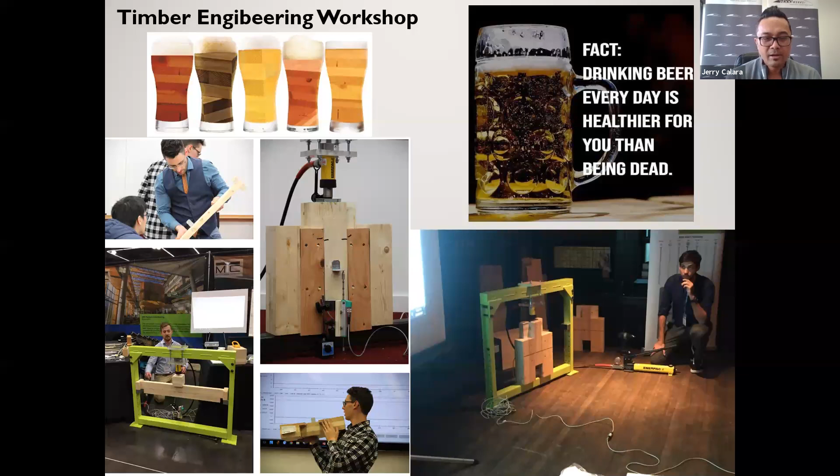Again, it's a great workshop. And it's amazing that, with the engineers, no offense to any of them, but generally they're very professional and straight up and business-like. And it's amazing how, once they have a few drinks, they start to loosen up and are willing to share and talk about their projects. So that's the whole purpose of these events, to allow the design community to get together, to network and to learn.

We also provide case studies. I showed you guys one earlier of the Philip J. Currie Museum. You can find these online, they're on our website. Some great resources for you guys, free downloads.

We also celebrate the architects and engineers and the design community. We hold a Wood Design Awards every year. The designers submit their wood projects into different categories, whether it's commercial building, educational building, institutional, whatnot. Then we fly in jury members, sit in the boardroom, and deliberate all day to come up with the winners of each category.

Then the winners of each category are celebrated at our gala, and also get published into this really awesome awards book. These books are pretty amazing. If we were in person, I would actually be giving some of these away to you guys. They're great books, really inspirational. So the winners get published into that.

We also hold our annual conference and trade show, called the Wood Solutions Fair. It's a full day of networking, learning, and visiting with all the different wood suppliers and manufacturers, and checking out some of the award-winning structures being presented on.

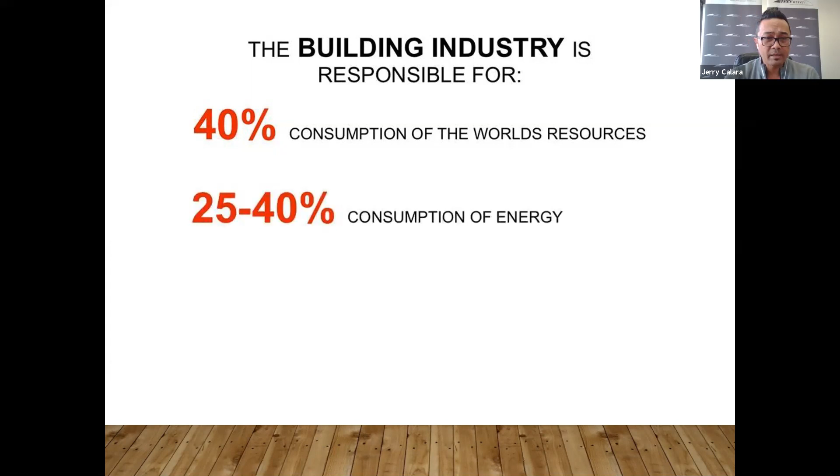For this pace of growth and development to be sustainable, it's essential that we rethink environmentally taxing traditional steel and concrete structures, and look to wood innovations offered for taller structures that are high performing and renewable to meet the coming demand. The building industry is responsible for roughly 40% consumption of the world's resources, 25 to 40% consumption of energy, 30 to 40% emission of greenhouse gas, and 30 to 40% of solid waste generation. The building industry uses mostly concrete and steel.

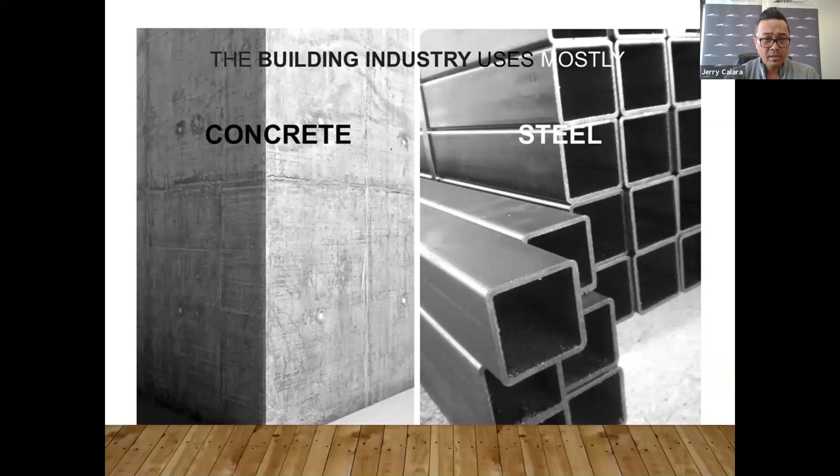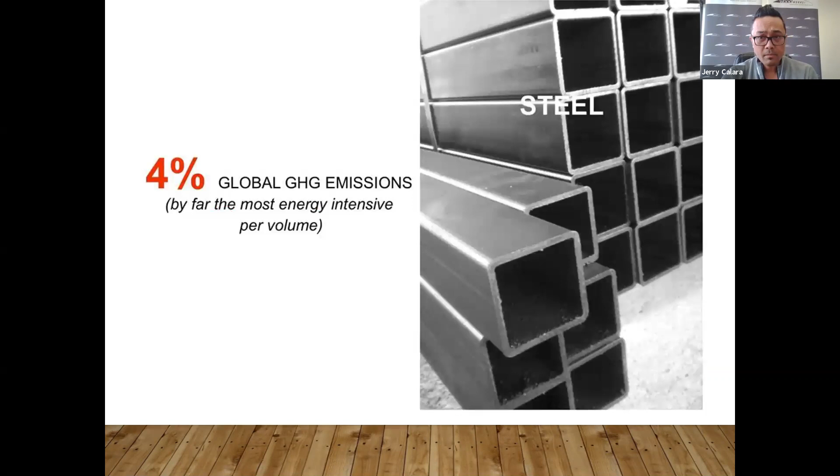Concrete is responsible for roughly 5 to 8% of global greenhouse emissions, and steel is responsible for roughly 4% of global greenhouse emissions. Add to that the airline industry at 1.6% and shipping another 3%. So we've got some really big problems, and it's posing some big responsibilities to not only the design community, but also provincial, federal, and municipal governments.

Wood as a material is a preferred building material for residential construction. It has been for decades, for centuries, in fact. New engineered wood products, EWPs, and code changes have increased the share of commercial markets, and new building systems and technology have been developed to push into the future of wood construction. Mainly, we're going to be talking about mass timber panels.

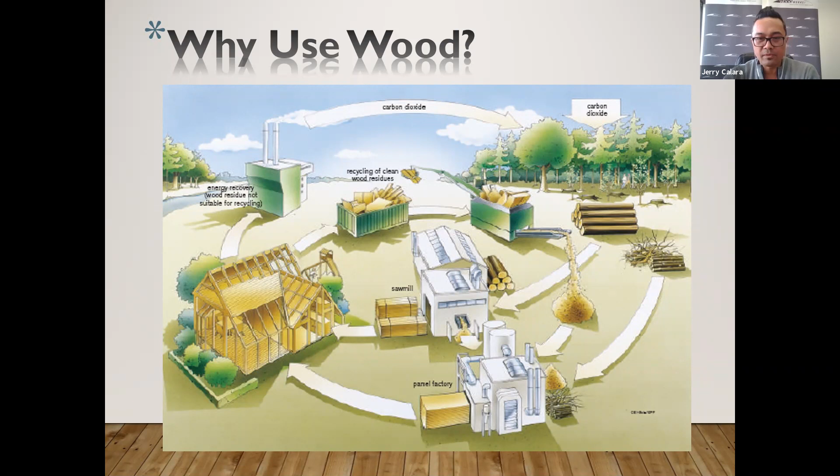We all kind of know the life cycle. When a tree is cut down, through photosynthesis there's carbon in there, and so the carbon it sequesters during its life cycle is retained within its cellular structure. That carbon is then placed in a dormant state, removed from the atmosphere for the life of that wood, for decades. So the manufacturing of wood products results in the storage of a portion of the tree's carbon in long-term storage media, such as houses, buildings, and furniture. The carbon is only released back into the atmosphere when the wood is burned or when it biodegrades.

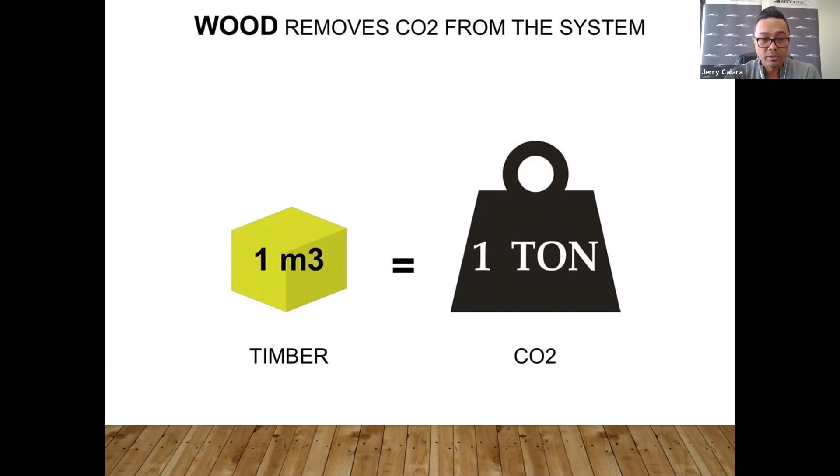One cubic meter of timber can hold roughly 1 ton of CO2. So your typical 2,400 square foot wood frame house holds approximately 28.5 tons of carbon dioxide, which is an amount equal to the emissions of a small car over 5 years.

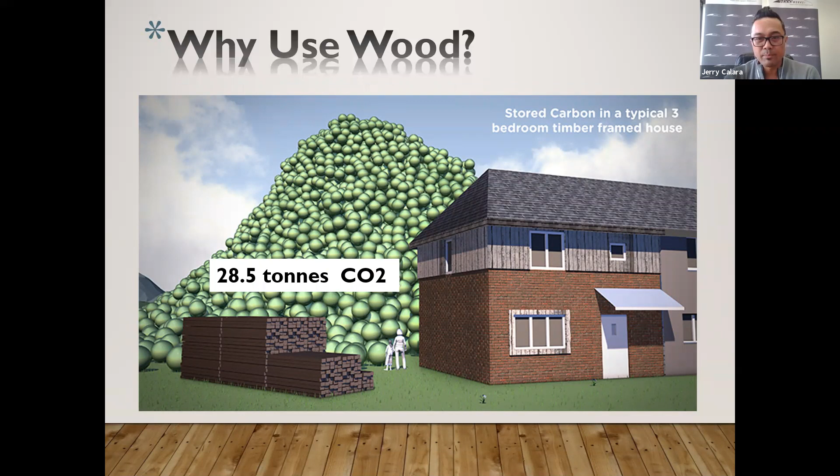More than half of Canada's forests are naturally reforested. Natural regeneration is supplemented by planting of, remember this number, 600 million seedlings per year, Canada-wide. Over 30 different species of trees are used in replanting activities across the country to remain faithful to the natural biodiversity of each area.

The rate of growth in Canada's commercial forests is such that in this hour-long lecture I'm giving you, the forest in Canada would have grown enough wood to supply over 2,000 houses in an hour. In Alberta, we plant roughly 2 to 3 seedlings for every 1 tree that we harvest, so approximately 65 million trees are planted every year just here in Alberta alone.

Forest companies are required to have long-term plans, because the land is crown land, and a lot of these forest companies lease the land for 50, 100, or 200 years. The province and the feds require them to have these harvest plans - 25-year plans, 50-year plans, 100-year plans - and a certificate is only issued after a thorough review by third-party auditors determines that, among other things, long-term harvests are sustainable, there is no unauthorized or illegal logging, and that wildlife habitat is preserved and soil quality is maintained.

Wood also has this natural benefit—it's a natural insulator. It contains a natural honeycomb of millions of tiny air spaces within the fibers. If you were to gather a whole bunch of straws together, that's kind of what it would look like under a microscope, a cross section of a tree. Those tiny air spaces create natural insulation.

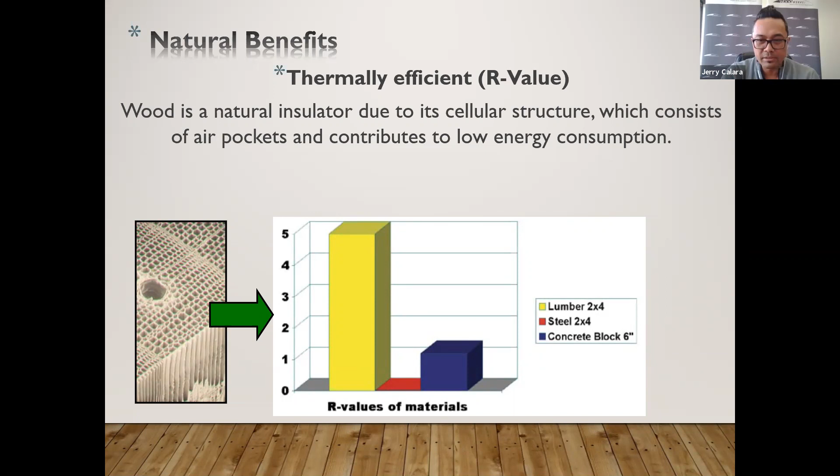Wood's been shown to be 400 times more effective than steel, 1,800 times more efficient than aluminum, and 8 times more efficient than concrete. Wood has an R value of roughly 1.5 per inch. Steel has essentially 0 R value—about 0.0024 per inch.

There's also a lot of health benefits too. Wood and health in the built environment has research supporting it in evidence-based design. One of my old colleagues, Dr. David Fell with FP Innovations, did research at the University of British Columbia while we were at FP Innovations, exploring the link between the use of wood indoors and the well-being of building occupants.

If you want to read more on that, you can Google his paper. There's also a white paper from Commercial Architecture with similar research you can look up.

Basically, Dr. David Fell's study looked at psychological stress responses in wood and non-wood environments. They had different offices—some had wood desks, wood shelves, and a plant in them.

The other office was just basically melamine IKEA stuff. They had subjects in the wood treatment room, and what ended up happening was the subjects in the wood treatment room displayed lower psychological stress responses before, during, and after a stress-inducing test versus the subjects in the non-wood room.

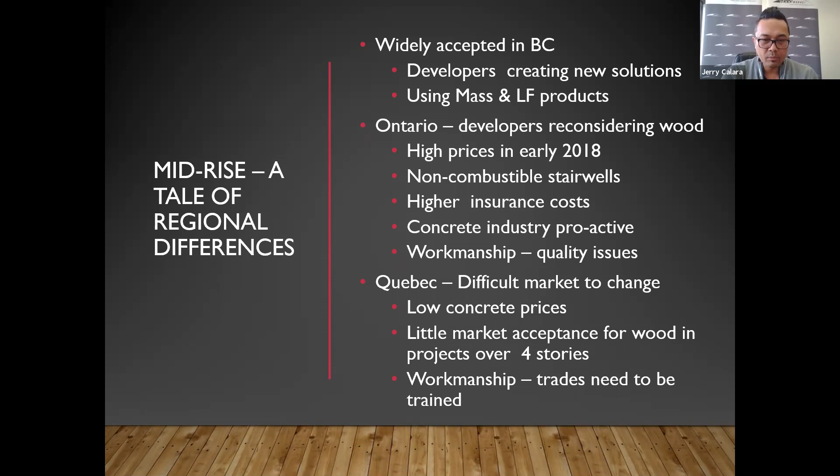The same thing with Quebec is, again, a difficult market to change. They have very, very low concrete prices there, and a lot of concrete manufacturers, so their concrete prices are very low. And again, the workmanship, the trades need to be trained over there, right?

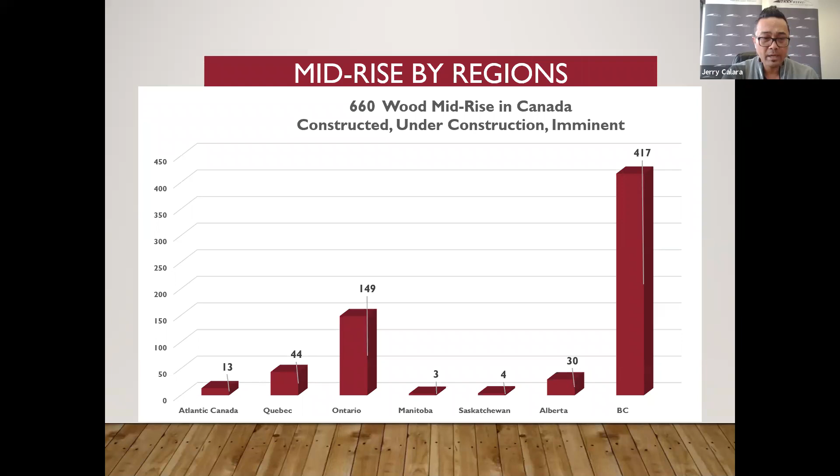This is a project in Vancouver, the Virtuoso, Adera Developments. Adera Developments were part owners of a company called Structurlam at one time. Since then, they've been bought out by a large investment firm out of the States. But with Adera being part owner of Structurlam, they had to kind of practice what they preach, right? So what they did was they started building some of their developments with the mass timber products they're producing.

So this is a 6-story residential light frame. It's a hybrid, so it's mass timber and light wood frame. It has a quiet floor system which competes with concrete. There's time savings, and it has superior acoustics similar to that of concrete, just because these mass timber panels are being used for the floor systems and the roof panels.

160 CLT panels were lifted at a rate of 1 every 12 minutes. You can see the picture below, the guys are installing one of those panels, installing one every 12 minutes.

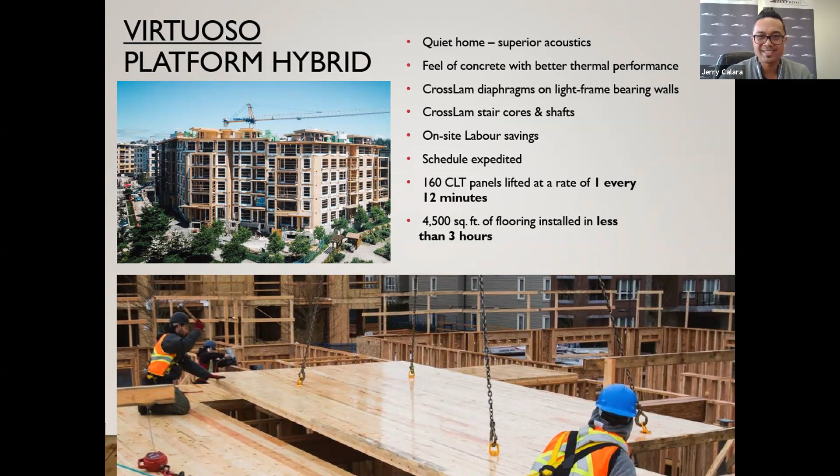And so they're able to frame up 4,500 square feet of flooring installed in less than 3 hours. So there's huge time savings there, right? If they were to do these type of floor panels in, let's say, I-joists or engineered wood products, it would take anywhere from a week to a week and a half just to frame out that whole floor system. Whereas with these mass timber panels, because they're covering off such a large quantity, they're able to install a whole floor of floor panels in a day, right?

Which allows them to start framing up the walls quicker, sooner.

This is another example, the Legacy in Langley, BC. This was sold as a higher end condos. You can see the CLT came in handy here, cantilevering out those balconies, and they were able to come up with these really crazy curvature balconies. They were able to do that with the CLT because a lot of that was already cut in the factory and then just shipped out to site.

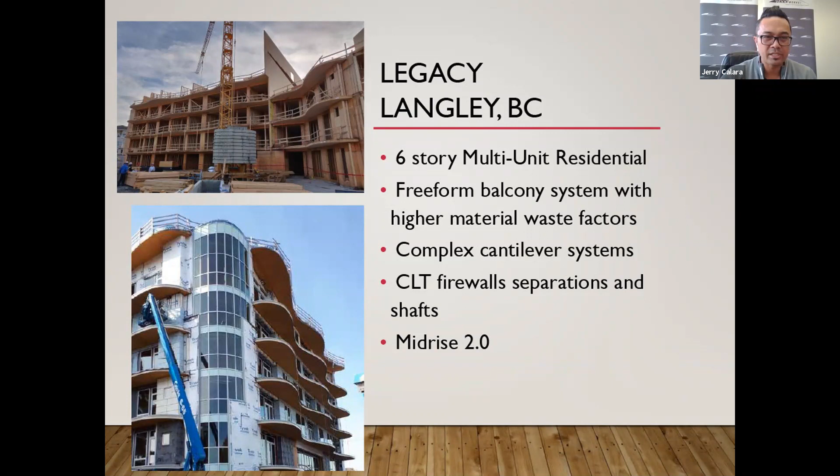Now this is Hockley Ave, another Vancouver project. Three of these large 6-story light frame hybrid structures. As a developer, if you're with developers, their biggest concern is costs and making money. If they're going ahead and building 3 of these 6-story buildings, they obviously see the value in this. They're not doing this just as a practice trial run. They're doing this because they know that they can make a huge return on their investment.

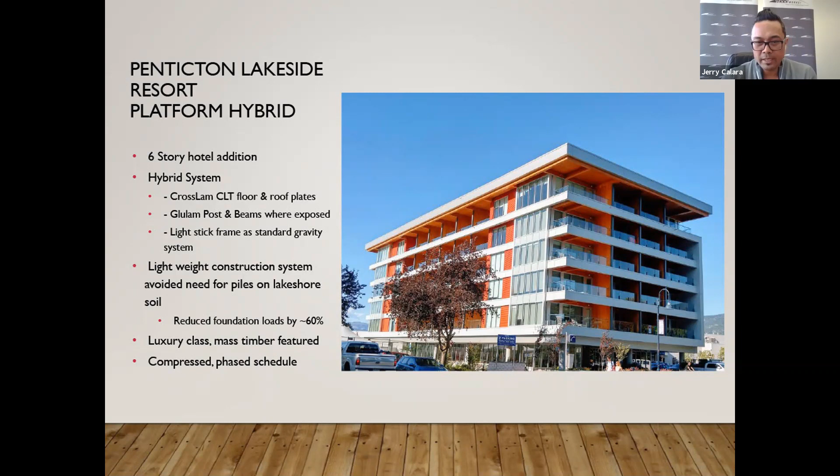So we have some of these solutions. Going to be talking about some of these new products with enhanced properties, which is going to allow the developers to build quicker, meet and exceed structural and fire requirements, and be cost competitive, and we can use these in mid-rise buildings. Mid-rise is considered 5 to 6 stories, and tall wood is considered anything 7 and above.

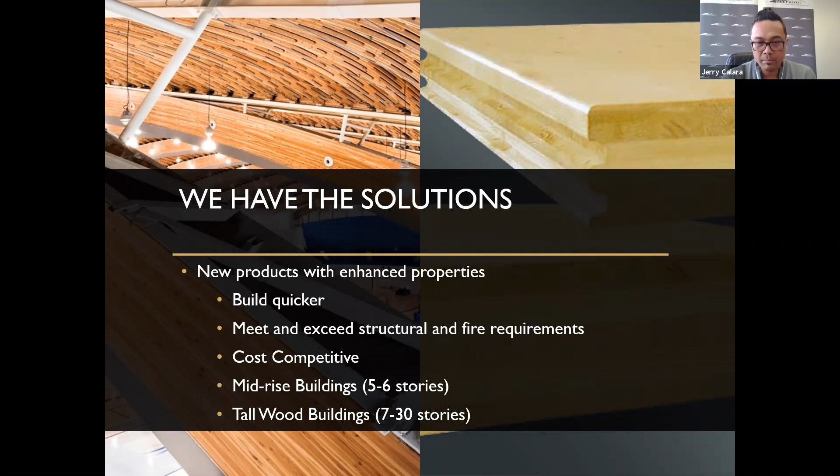Mass timber construction uses large and ideally prefabricated wood for walls, floors, and roof construction. Because of their high strength and dimensional stability, they can be used as alternatives to concrete, masonry, and steel in many building types.

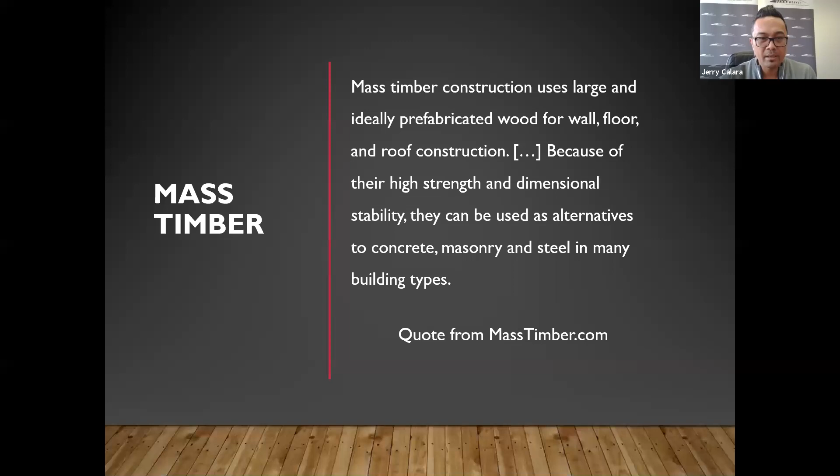So these are some of the innovations that we're going to talk about: nail laminated timber, dowel laminated timber, glue laminated timber. You guys might already be familiar with cross laminated timber, and then there's LSL, LVL, and the wood concrete composite. So you're probably thinking, wow, I didn't realize there's so many different options of mass timber out there. Well, there are, it's not just cross laminated timber, there's other solutions out there. The thing with cross laminated timber is that it's being shown more, it's being marketed more heavily, and that's probably why you're a little bit more familiar with cross-lam than some of the other options available to you guys.

So Nico, before I get into the mass timber products here, are there any questions that have kind of popped up yet?

Yeah, you have a question about the acoustics of the floor assemblies. Okay, how did they achieve high acoustics controlled floor assemblies?

Okay, so there's many different solutions. We've partnered with a company called Acoustitech, and they have different types of solutions like matting solutions. A lot of times when you're using these mass timber panels for floor structures, generally you're going to add a layer of either gypcrete or concrete. Depending on the thickness, that'll help you achieve the acoustic rating that you require. So with the floors, there's an IIC classification that you need to meet, and through the walls and whatnot there's an STC classification that you need to meet.

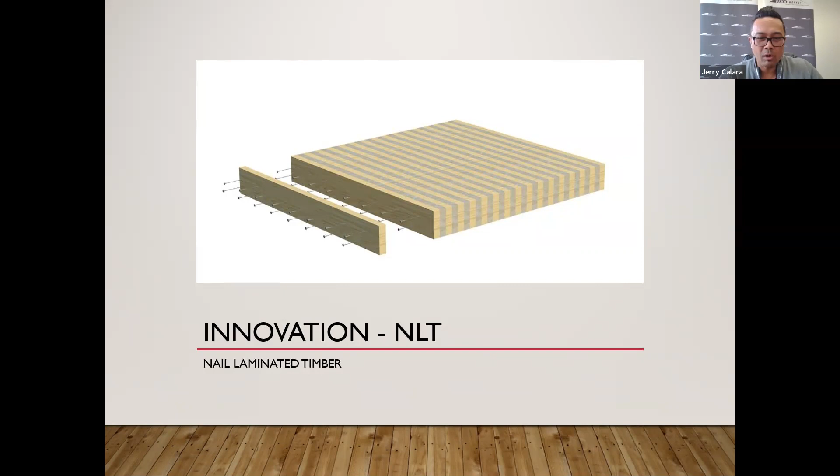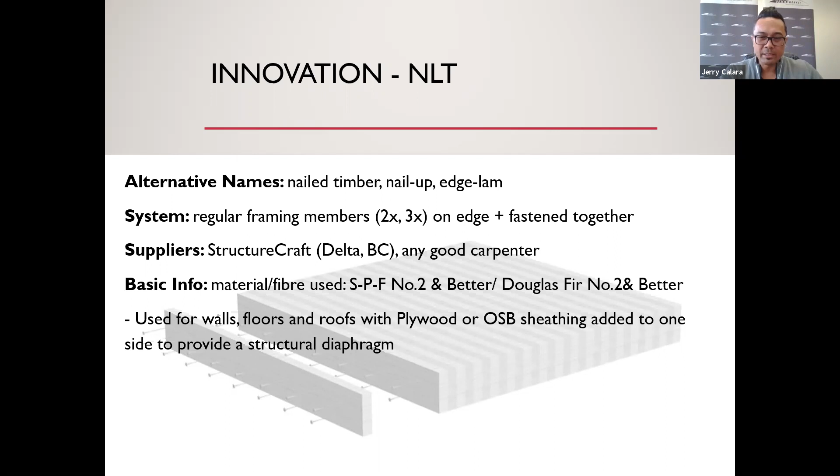Okay cool, so the first one I want to talk about is NLT, nail laminated timber. It's a structurally efficient and economic panel product, which can be used for floors, walls, and roof structures. Basically, NLT is created from dimensional lumber stacked on edge. So you can take your 2x6, 2x8, 2x10, 2x12, and then laminate them together using nails, mechanically fastening them with nails, essentially 1.5 inches on center. Now, the thing with NLT is that in order to create a structural diaphragm, you need to add a layer of plywood or OSB sheathing on one of the sides, and by doing that it allows you to have that structural diaphragm that you require.

NLT is sanctioned by the building codes and qualifies as heavy timber. So as such, it doesn't require an alternative solution to be used in buildings, okay?

North American lumber by nature has variations in characteristics like straightness, bow and sweep. These are all addressed through a factory quality control process, resulting in panels which can be relied on to be square and true as the building is put together on site.

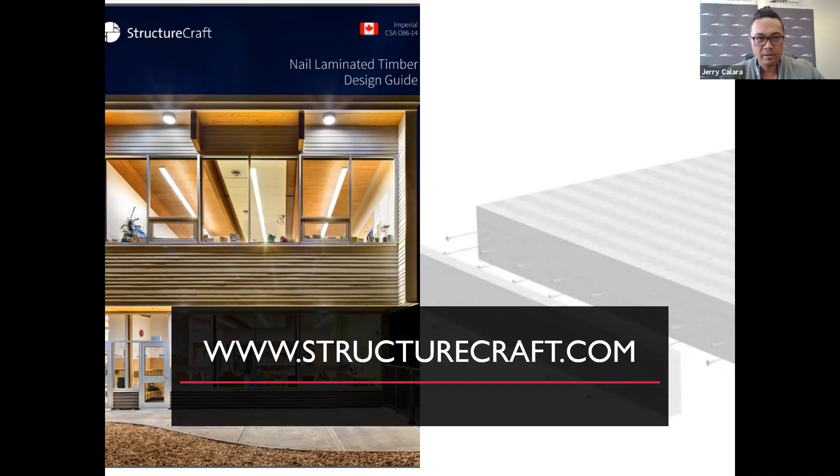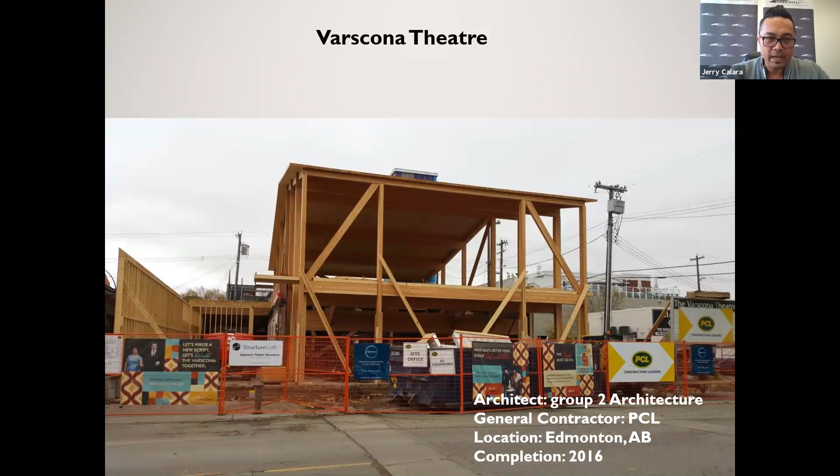This is Varscona Theater, here in Edmonton. Again, NLT panels for the roof structure, and they also used it for some of the seating and the stage as well.

So DLT is dowel laminated timber, very similar to NLT, except instead of using nails, you're using wooden dowels to connect all the members together. You can see you're able to create some really neat profiles here using DLT.

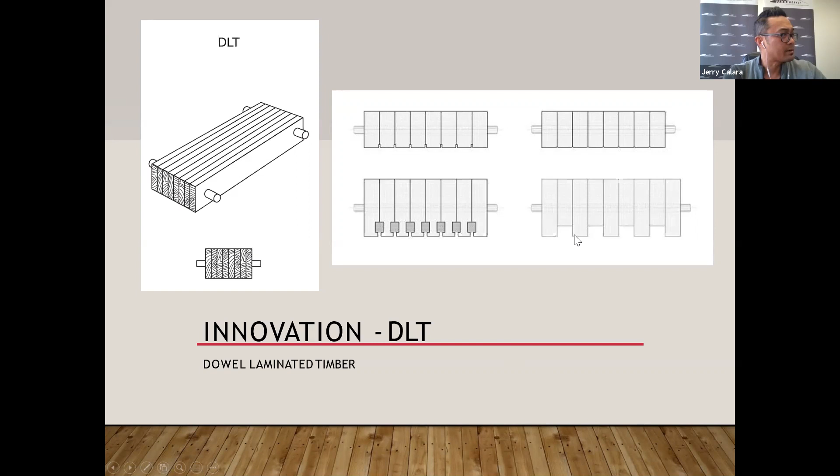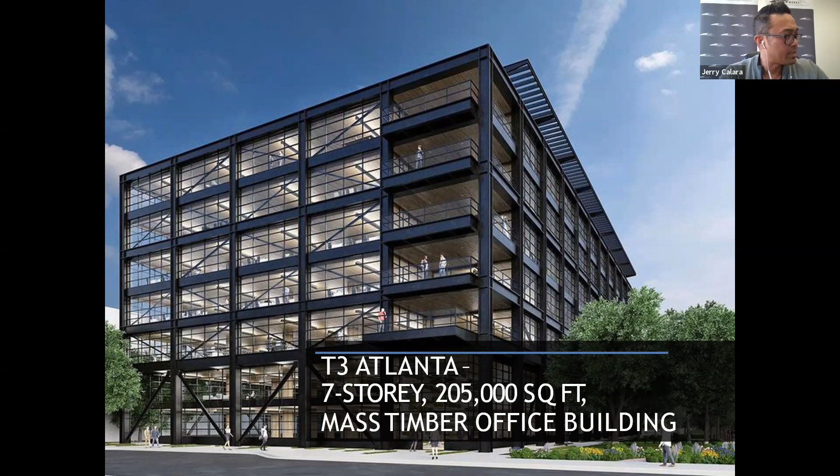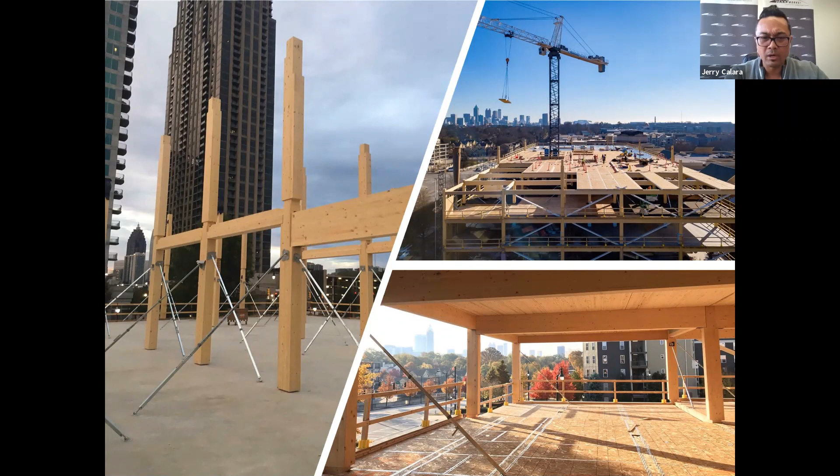This is one of their projects, T3 in Atlanta. It's a 7-story, 205,000 square foot mass timber office building, and they used DLT here. I believe this one is 6 stories on 1 concrete story, but you could see that the building turned out beautiful.

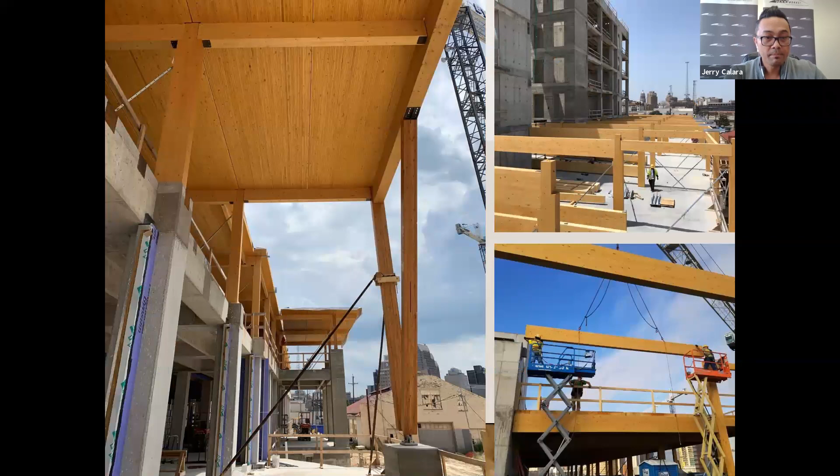The Soto is a 6-story, 120,000 square foot mass timber commercial office building. This is San Antonio's first major mass timber project, again 5 floors of mass timber on 1 story of concrete, and that was using DLT as well.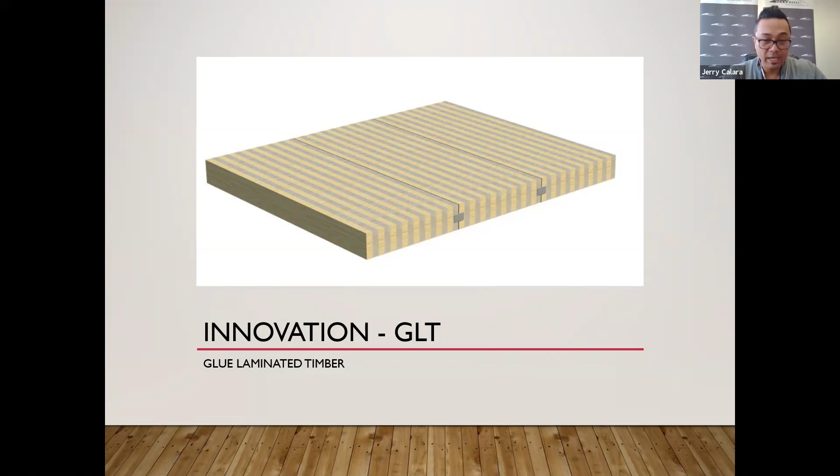Next innovation is GLT. Not really an innovation, it's actually been around for a long time. Generally what we're using these for is it's basically manufactured the same way as a glulam beam, except this time it's turned on its side. It's manufactured to the same high standards as glulam, and it's basically guaranteed to possess the same long-standing history and durability as glulam.

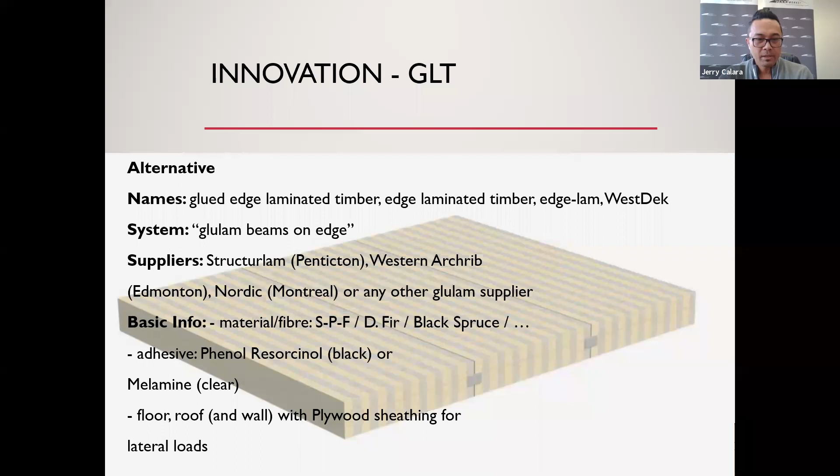You can see some of the manufacturers in the West here: Structurlam, out of Penticton; Western Archrib, as I mentioned, based here in Edmonton; and Nordic Lam also produces it out in Quebec. These panels are produced in 2-foot widths, from 3 1/8 inch all the way up to 8.5 inches deep, and up to 66 foot lengths.

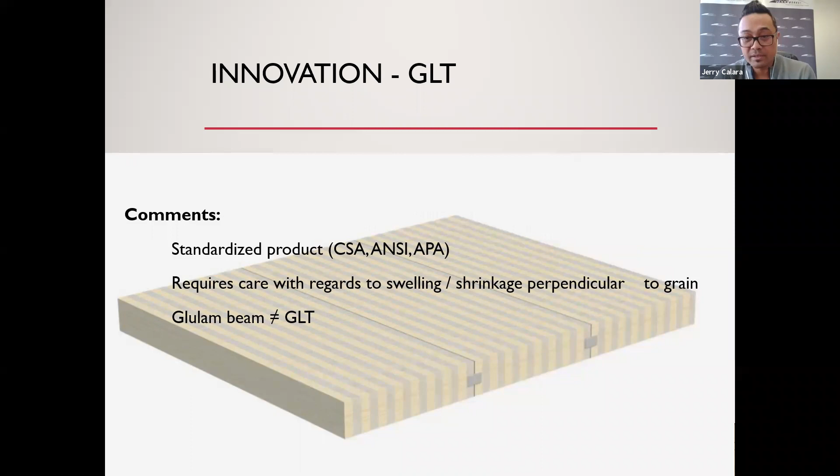Turned out to be a beautiful building.

Next innovation is CLT, and I'm sure most of you guys are probably all familiar with CLT. Basically, it's wood panels typically consisting of 3, 5, or 7 layers of dimensional lumber, oriented at right angles to one another and glued and pressed to form structural panels.

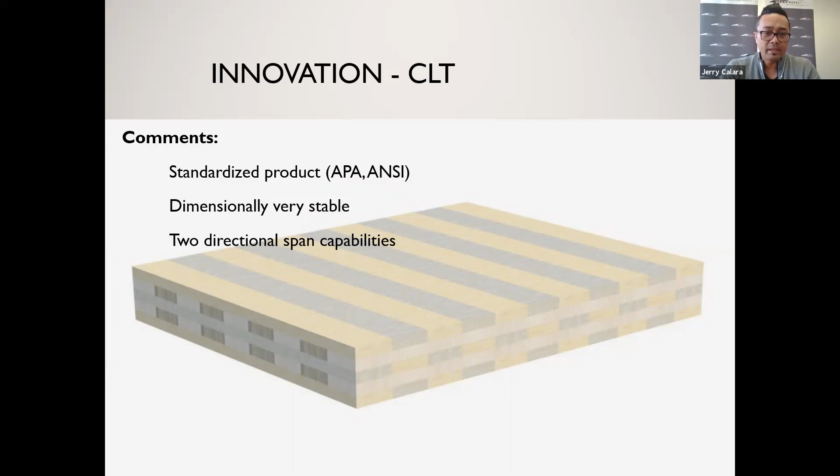Because of CLT's structural properties and dimensional stability, the mass timber product is well suited for floors, walls, and roofs, and used extensively in mid-rise construction and tall wood buildings. CLT can be manufactured to customized dimensions, and panel sizes vary by manufacturer, while the length is usually limited by transportation restrictions.

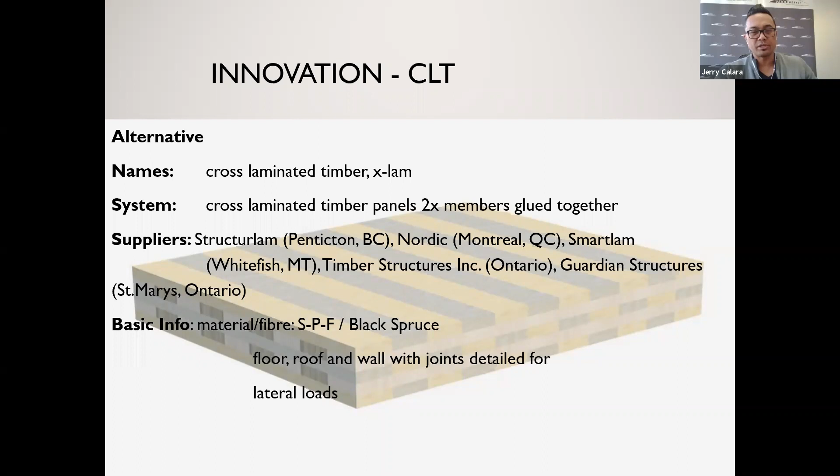What's neat about CLT is that here in North America, FP Innovations developed this CLT handbook, which allows you to essentially design a CLT building just by using it, because most manufacturers have to design and produce to this standard. Whereas in Europe, where CLT was created 20, 25, 30 years ago, each of the different manufacturers consider their CLT a proprietary product, so each one has different design values, and they have to have their own engineering teams design their products over there.

This is Structurlam, based out of BC, one of the major producers of crosslam. Nordic Lam, they're out of Quebec.

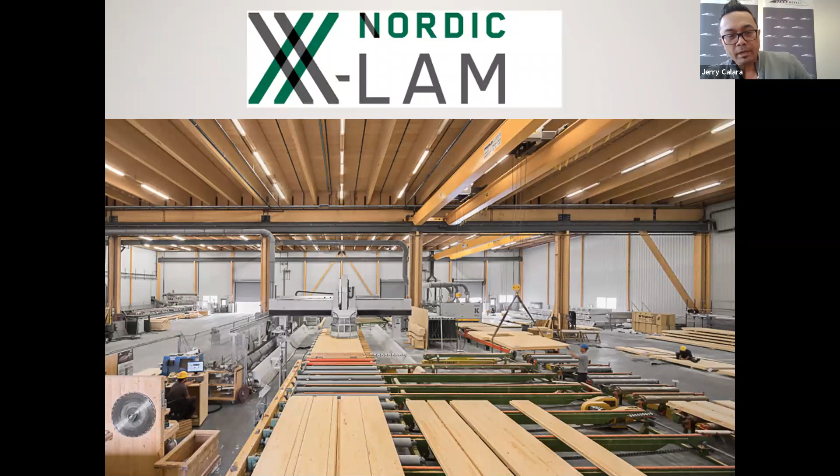And here's another opportunity. If anybody, once we win that 50 million from Elon, we'll take 10 to 15 million of that and build a mass timber manufacturing plant, because the demand in the US is going to be so tremendous that the producers online right now are not going to be able to keep up. I'm going to show you some numbers here.

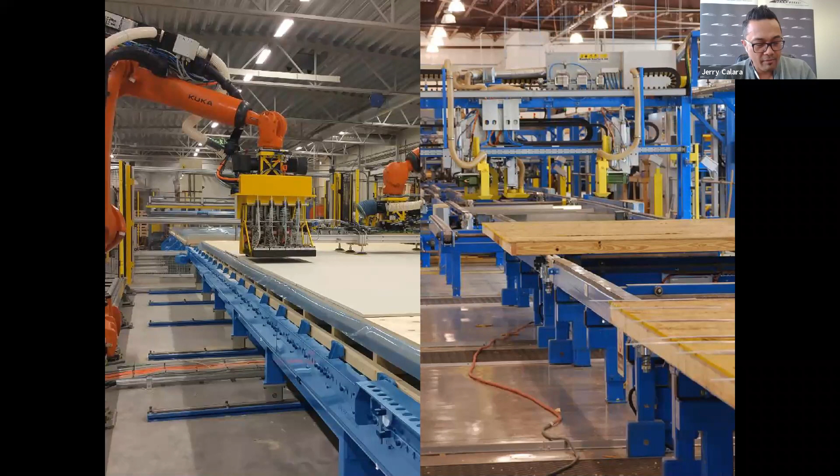And Katerra, the Katerra Group - these guys are massive, man. They've got really deep pockets, and they're buying up everything. I'm sure you guys have heard of Michael Green - Michael Green Architecture, they bought them. They also bought Equilibrium Consulting. So two of the biggest wood advocate firms you could think of here in Canada were bought up by this investment company, Katerra. Now they have the whole team, a whole system where they're designing these mass timber buildings, and they have a lot of money invested in their manufacturing plants. They have a plant online now out of Spokane, Washington, and they're producing CLT out of there.

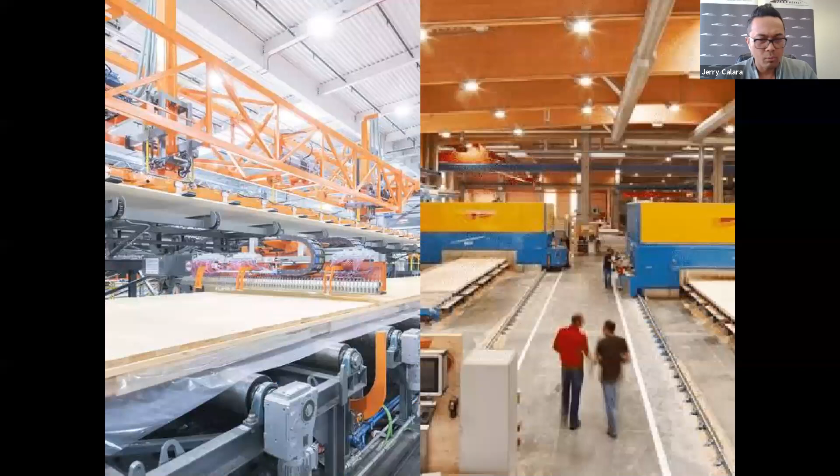A lot of it is automated - they use robotics and automation. Generally when you're thinking about wood products, you're thinking forestry, these lumberjacks with big beards and an axe. That's not the case anymore, man. This is new technology, and a lot of it is highly automated, so there's not a lot of people on the line. A lot of the labor force is actually in the office doing designing and preparation. A plant like this, you might only need a handful of guys, maybe 6 or 7, to actually run it.

So this is one of the examples - this is the Fort Mac Airport. They used CLT for the roof panels there, you could see. They spaced them out, left that space there to run services - their electrical, sprinkler systems, and some HVAC through those cavities. So you could see you could still come up with really neat designs and still accommodate the services.

This is in Calgary - a full wood building, the New Brighton Middle School. They're using glulam beams, CLT floors, and dimensional lumber for the walls.

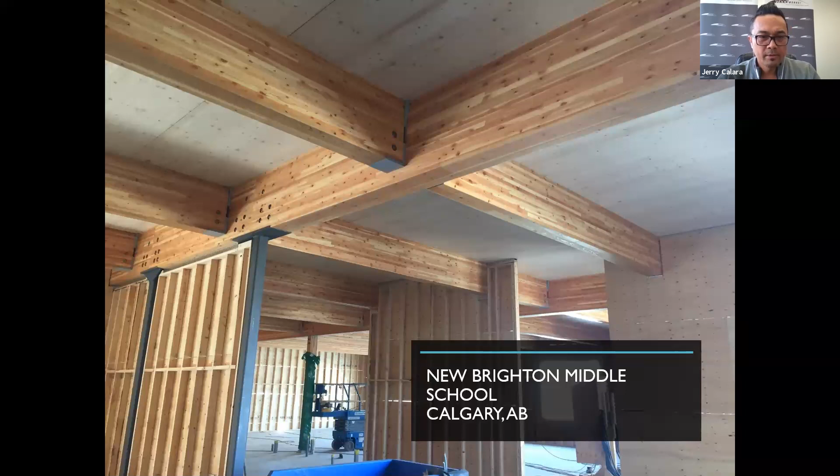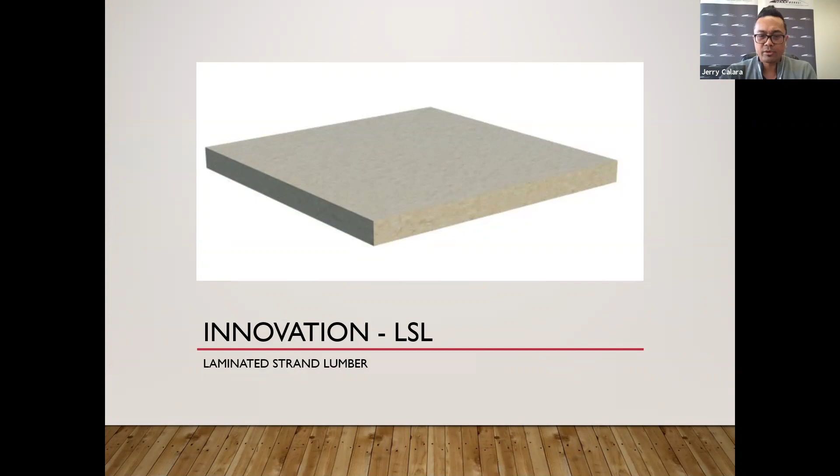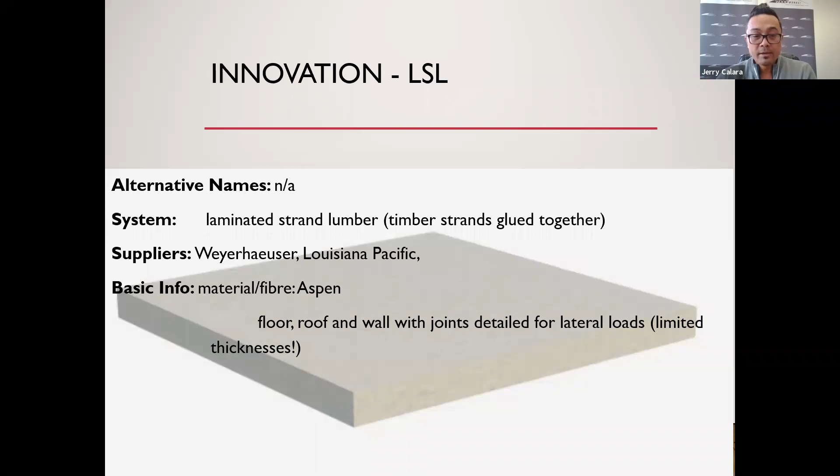Next will be the LSL panels. These are laminated strand lumber, typically used as beams. These panels are manufactured similar to the way they manufacture beams and columns, made by shredding wood from fast-growing trees, low-value hardwood logs such as aspen, birch, and poplar, into thin strands. Then they orient these thin strands for maximum strength and glue them together into long billets using a steam-injected process.

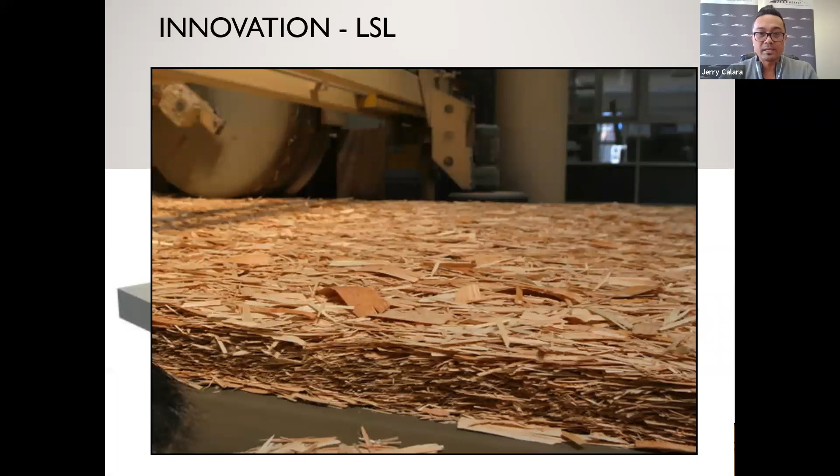Normally what would happen is they'd take these panels and rip them down into beam sizes, like 9.5 inch, 11 7/8 inch, 14 inch, 16 inch beams. But instead, they're manufacturing these from 4-foot panels up to even 8-foot panels, and using them for floors and roofs.

Due to somewhat random strand arrangement, LSL panels provide a really unique architectural aesthetic. It was used in the Civic Center in North Vancouver, where you can see they sanded down the product, put a really nice varnish on it, and used it quite extensively for this building.

Next innovation is LVL. Again, not a new innovation, but a new way of using it. LVL panels are made from peeler logs, basically in the same production line as LVL beams. They're engineered to precise design values with a very high strength to weight ratio. LVL panels are suitable for structural walls, floors, and roof applications.

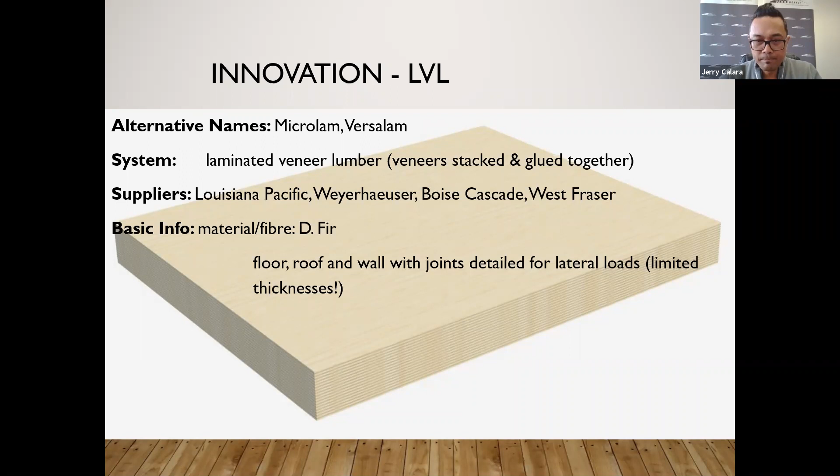Similar to LSL, normally they would rip these down and use them as beams, but they're using them as floor panels and roof panels. With the increasing interest in mass timber use for diaphragm applications, manufacturers are beginning to position LVL in full sheet formats. In typical manufacture, all veneers are laid up so the grain direction is the same in all veneers, with the grain basically parallel to the span.

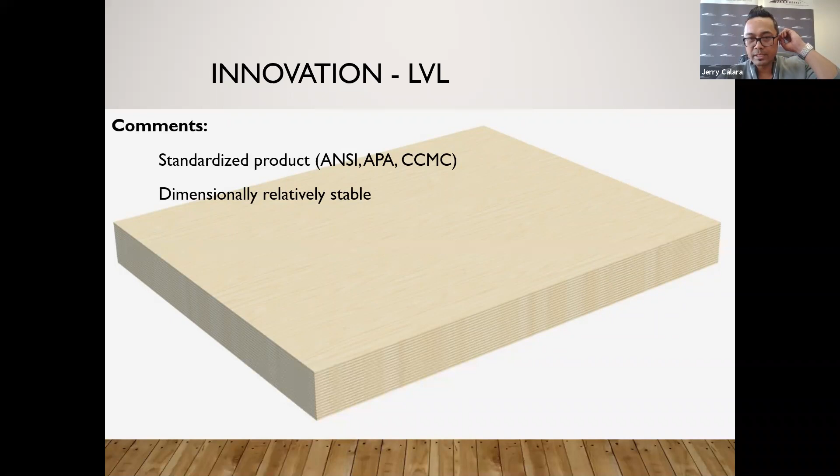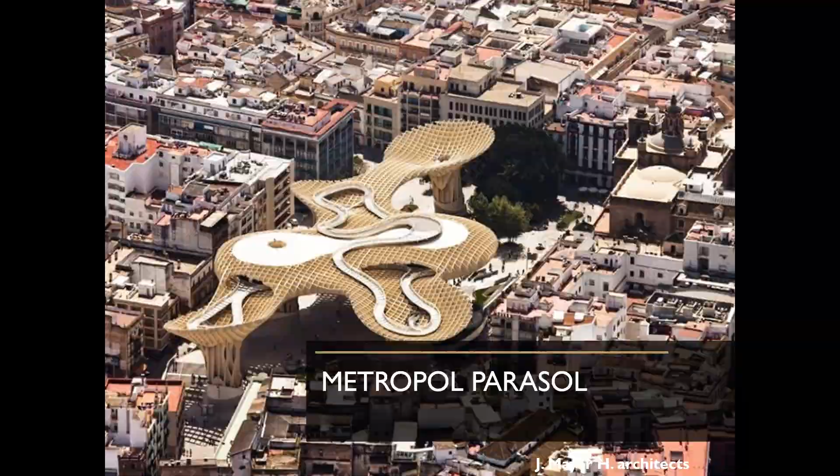This is a beautiful roof structure built in Seville, Spain. The image is really neat because you can see this really large wooden canopy in the middle of a concrete jungle. For generations, their culture has built with brick and mortar, concrete, or masonry, so to have this big, huge wooden roof structure in the middle of their city is really neat. It's a public space, and they hold big dance parties underneath the canopy there.

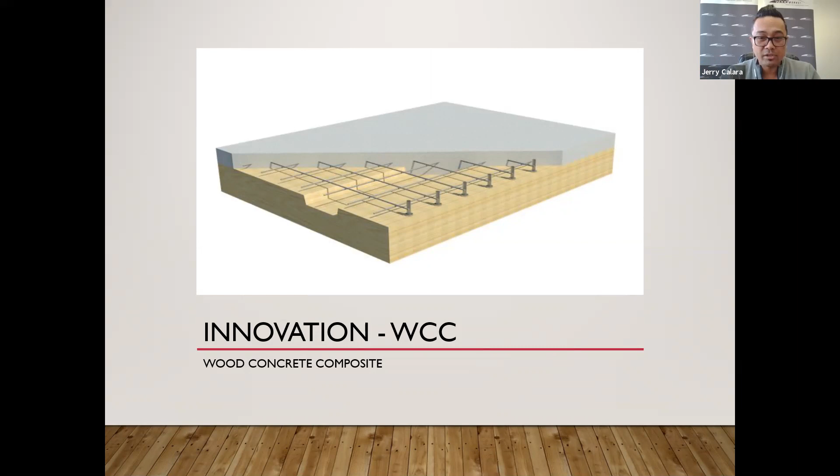Last thing we're going to talk about is wood concrete composite. It's a technology which focuses on optimizing performance and material requirements by engineering a structural connection between the timber and the concrete components. Structural efficiency is gained by creating composite action between the two materials. This hybridization enables designers to reduce cross sections, increase spans, and streamline structures in pursuit of sustainable architecture. Wood concrete composite panels can be used as floor panels or wall panels, using either timber panels or beams.

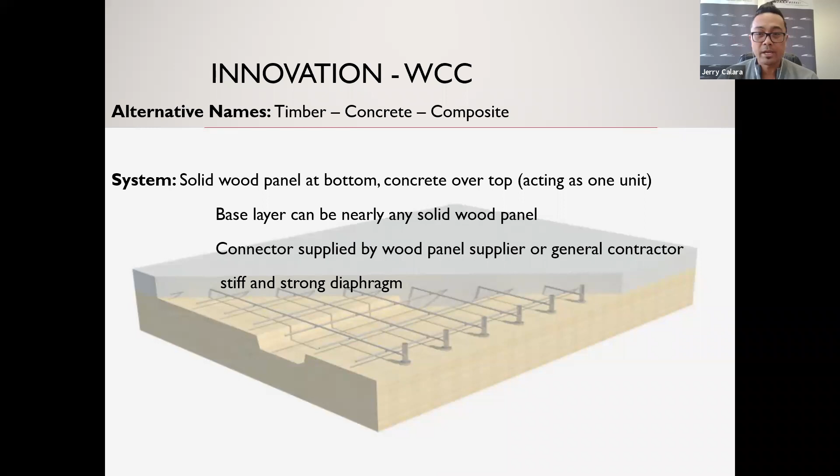There are many methods of creating composite action between the timber and the concrete. One common option is to use diagonal incline screws, half drilled into the timber elements and left protruding into the concrete topping. Once the concrete topping is poured onto the screws, that's what creates the composite action.

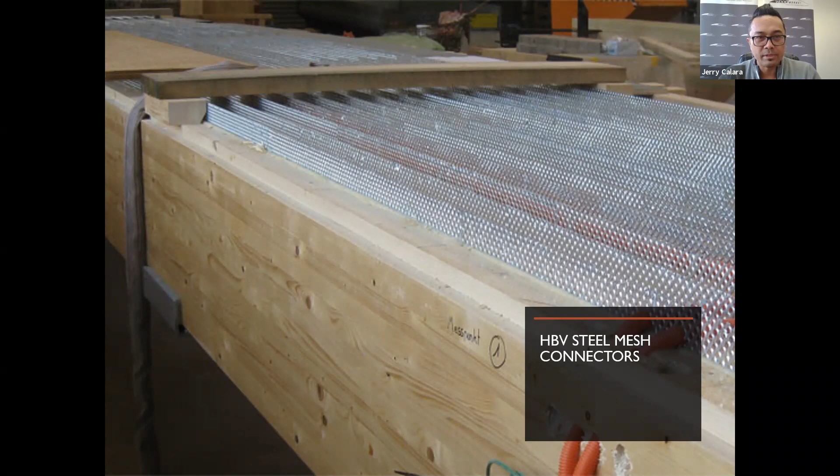There are other proprietary connectors available, including the HBV steel mesh connector. They slot out grooves into the timber panels, then epoxy these mesh connectors into the timber panel, locking them in there. Once they pour the concrete on top, it interweaves between all the holes in the mesh, and that's how the composite action is achieved. This is one example where it was used, on the UBC Earth Science building.

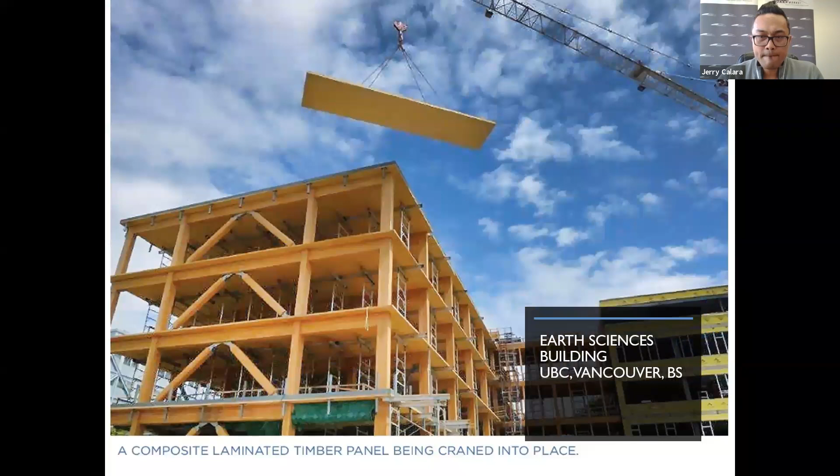We're running out of time, so I'm going to try to whip through the tall wood buildings real quick here. We think mass timber is going to be best utilized in tall wood buildings.

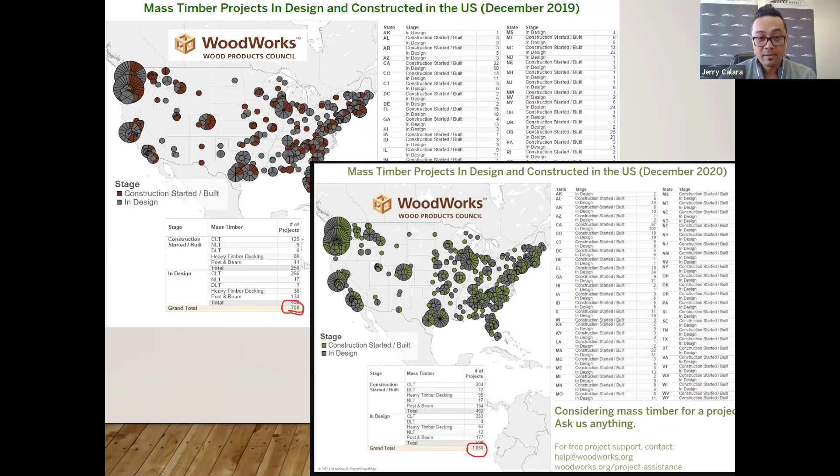Our counterparts down in the US, the WoodWorks group, assist and track all these mass timber buildings being designed or built. In December 2019, there were roughly 708 mass timber buildings that had either started construction or were in the design process. In December 2020, that number jumped up to 1,060. So during a COVID year, there were still 300 new mass timber projects either in the works or in design. You can see there's tons of opportunity with mass timber across Canada and the US.

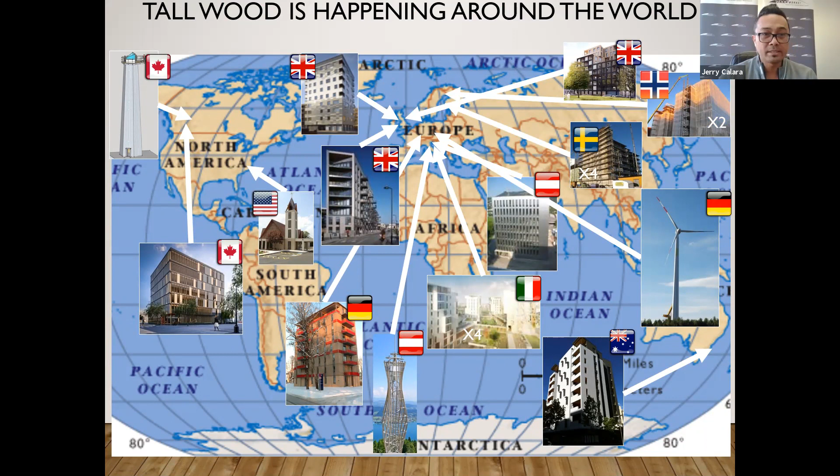Tall wood is happening around the world, and there's this global revolution.

And what we want to do is change the world one mass timber project at a time. We know that wood is a competitive option for tall wood buildings because it allows for faster and safer on-site construction. These prefabricated sections can be manufactured off-site, shipped to the project, and then assembled on-site, significantly shortening the project timelines and improving safety and accuracy.

It allows for tighter envelopes, excellent fire resistance ratings, and excellent structural and seismic performance. Some significant advantages include the ability to build higher in areas of poor soil, since the superstructure and foundations are lighter compared to other building materials. It's quieter to build on site, so adjoining neighbors are less likely to complain, and workers aren't exposed to high levels of noise. Worker safety during construction can also be improved with the ability to work off large mass timber floor plates versus steel joists or I-joists, which are kind of flimsy. It's easier for workers to work off these massive large panels than individual pieces.

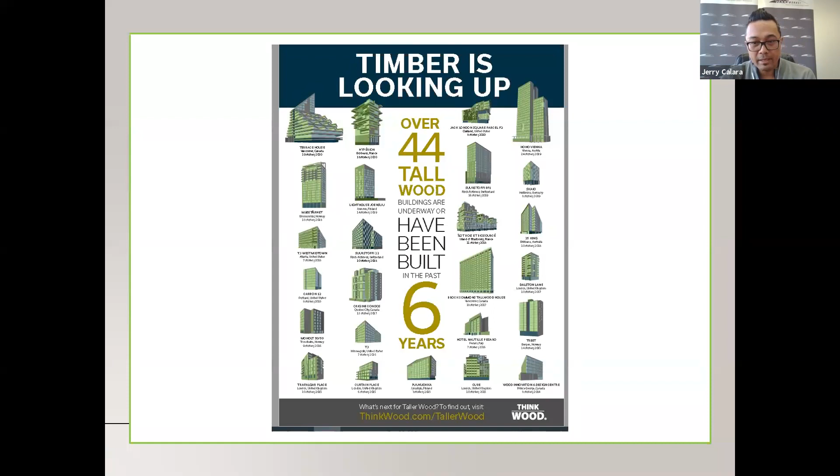So as you can see, timber's looking up, and there's basically a race to the tallest. With our recent code changes in the NBC, Alberta has already adopted 12 stories in Canada. Alberta is one of the first provinces to actually accept the tall wood provision.

BC is a little bit different. Vancouver has accepted it, but the BC government has not accepted it as a province. What they're doing is the BC government has said, okay, if any municipalities want to build 12 stories in BC, we'll support you, but we're not taking responsibility. That's kind of their stance, but hopefully this will eventually roll out nationwide.

In the US, they're going to be able to build up to 18 stories. So again, some big opportunities over there, you guys.

Now I need to first mention Michael Green's concept, the FFTT, which stands for Finding the Forest Through the Trees. Michael Green was the first to do a comprehensive analysis on tall wood buildings covering environmental, structural, seismic, fire, envelope, and cost factors, all documented in the Case for Tall Wood Buildings, released back in 2012. That's really the study that kicked off the tall wood buildings race to the top.

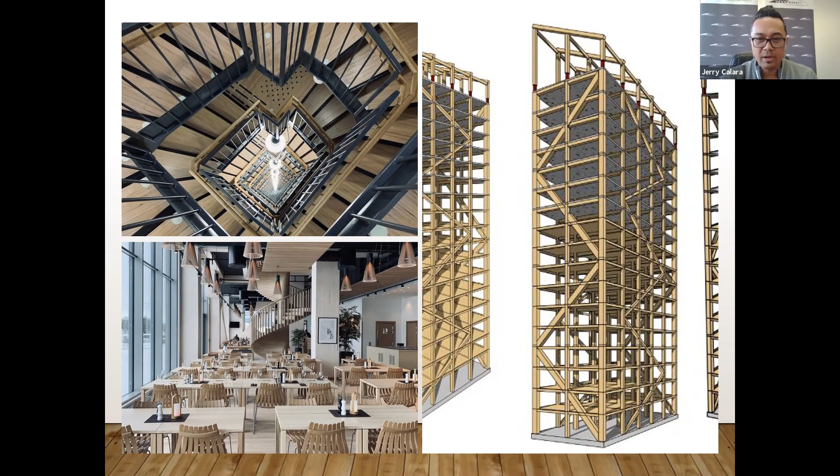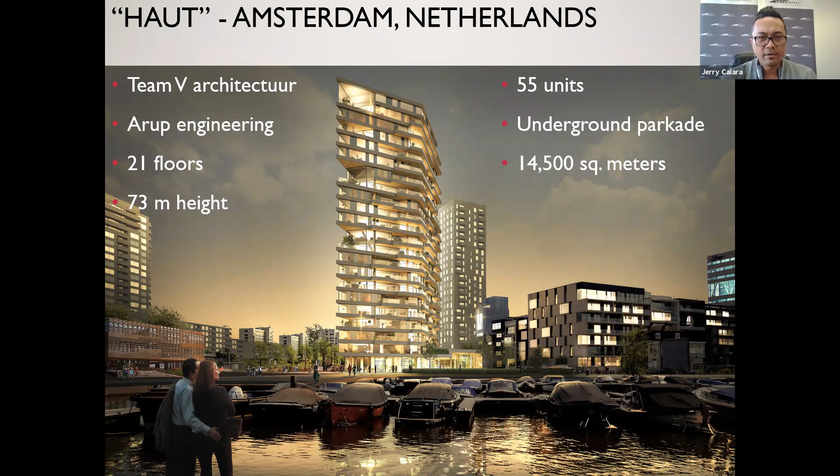This is Haut. This one's already started. It's 21 floors, 55 units. The project name is short for Haute Couture, coming from the tailor-made design of its 55 apartment units. You can see it's a nice looking building.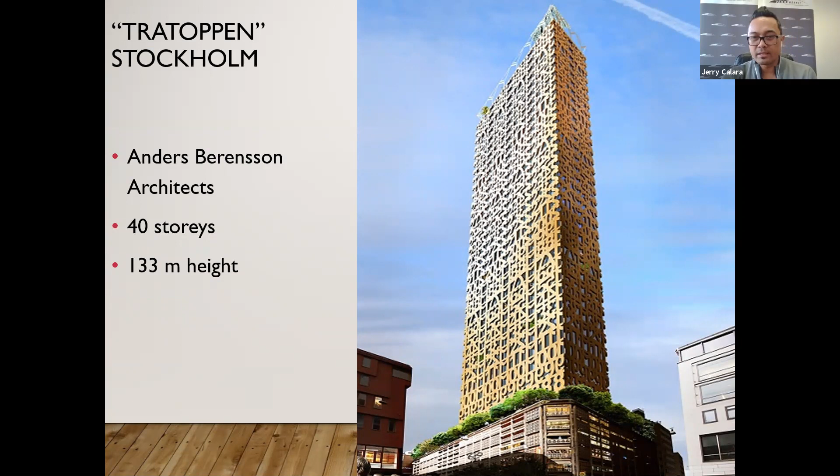This is conceptual plans for the Trätoppen in Stockholm. Again, this is just a conceptual design, but what's neat is the way they did the facade — they numbered all the floors on the exterior, which also provides shade. This is really neat, maybe some design ideas for students working on their capstone.

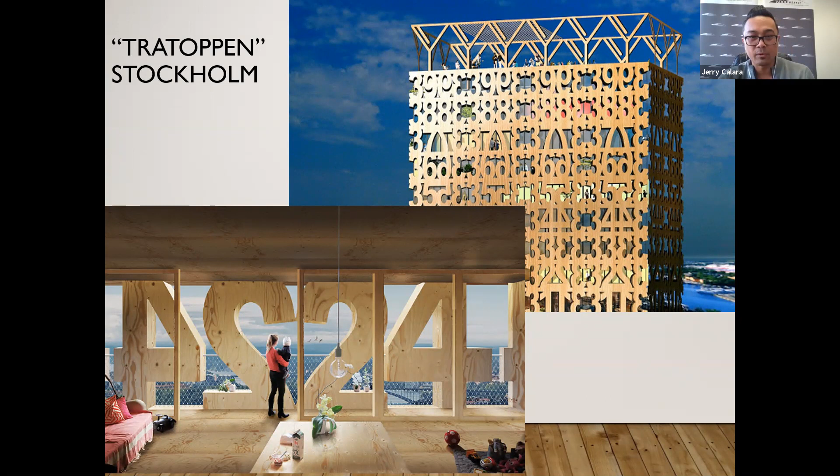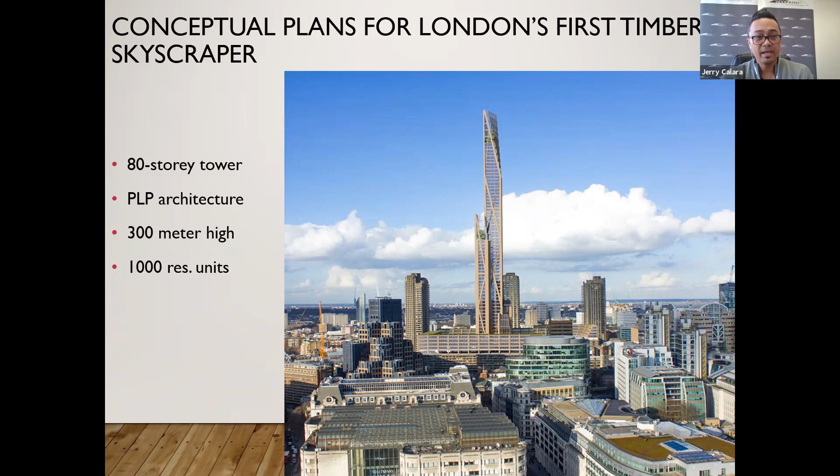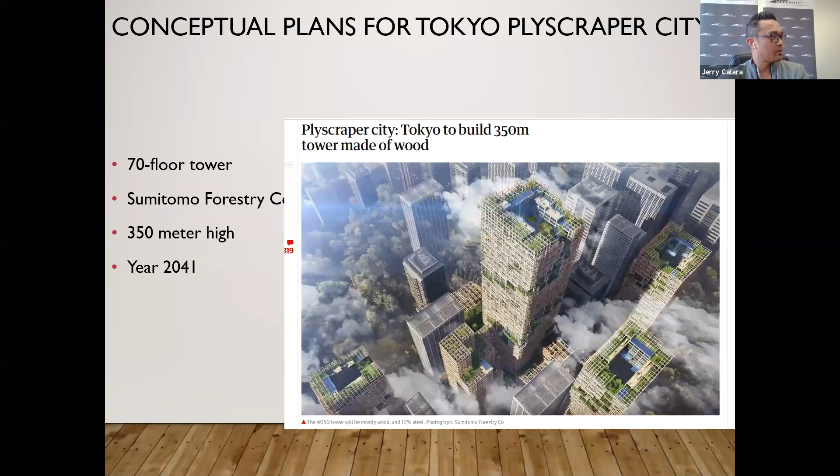Okay, so what about Canada? What's happening here? Well, the latest round of funding — I mean funding from NRCan — NRCan is giving grants and funding to projects, using them as demonstration projects. They're giving some of these projects anywhere up to $5 million worth of free money to help assist them with building these demo projects.

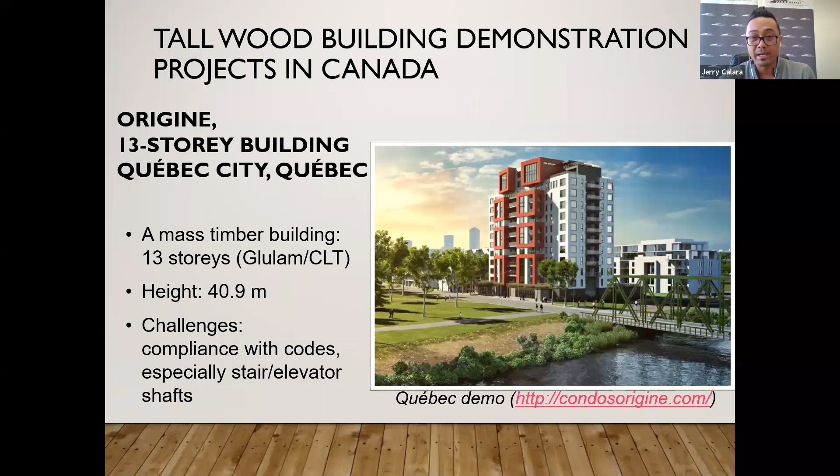This one is already built. This is the Origine, a 13-story building in Quebec City. I went and toured this. This is actually an amazing building. It's condos, and it's already been built.

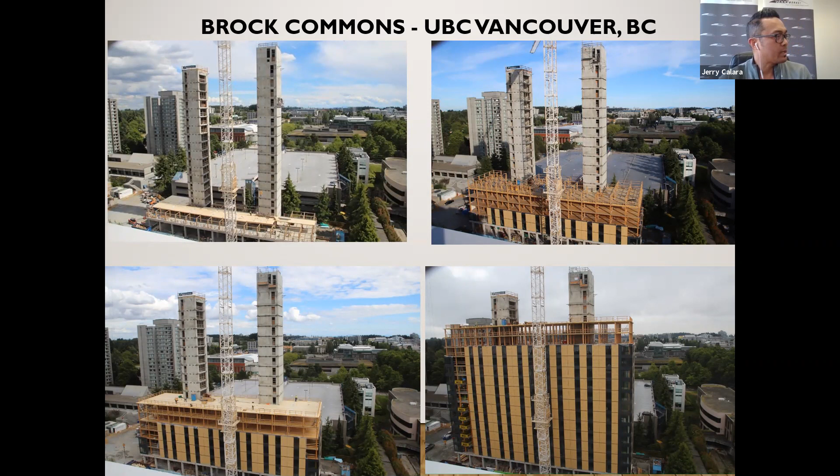You guys all know about Brock Commons, an 18-story mass timber building. This once upon a time was the tallest timber building in the world. No longer, but it did hold that designation for a little while. It's a hybrid, so you can see they use the concrete core for the stairwell and elevator shaft, and then CLT floor panels and glulam posts.

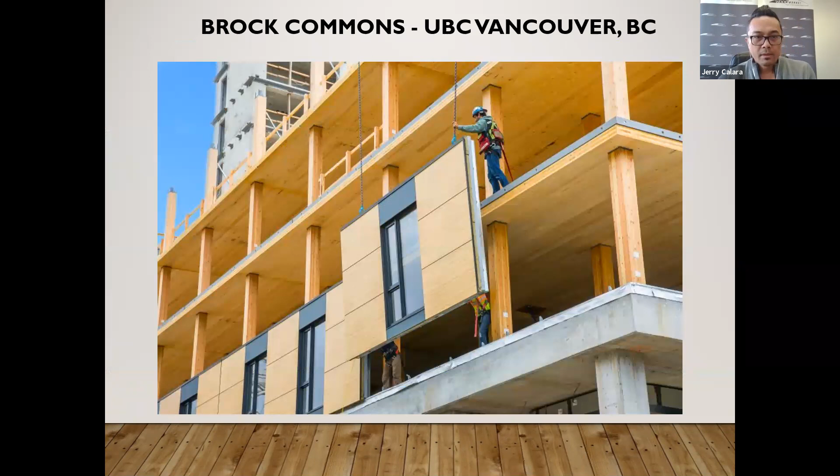So what's next? Well, we need to continue to support other provinces to adopt the National Building Code, the NBC, to allow up to 12 stories. Continue to support NRCan with their communication working groups. And continue to support the development of new solutions, which will help reduce the costs and improve replicability.

So I'm going to finish off with this quick little video here, Nico. Hopefully you guys can hear it. Yeah, it's good, you can hear it.

There's something really wonderful to walk into the forests of Canada, the scale of the trees that you see, and you realize those trees are grown by the sun, and they've done this incredible process of photosynthesis to create the strength that they've created over their lifetime. Respect for the tree and its life is something that I believe is part of the respect we put into the architecture of building with wood. Wood resides as the material of choice to make a difference in the quality of our buildings from an environmental point of view. And now we're blasting into this era of technological innovation in wood that we've never seen before.

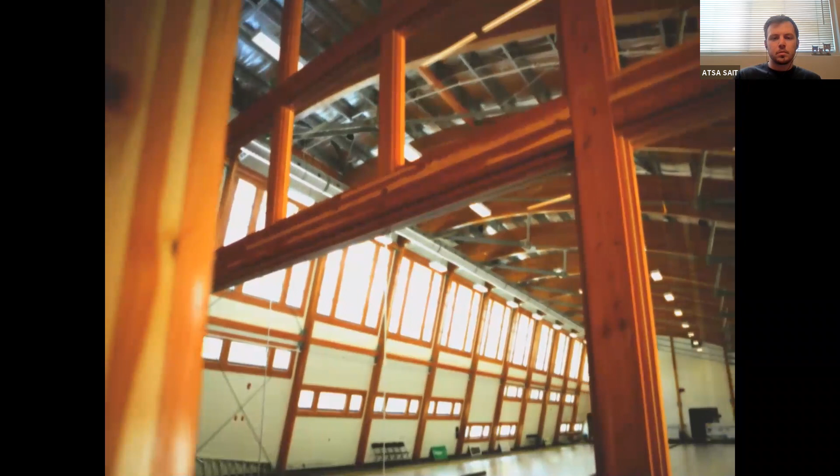I think there's a connection that people have, an understanding about wood that is different. Wood structures really have an unlimited lifespan. We took pieces that were 50 years old out of this building. We even took some wood out of a school in Canmore that was 30 or 40 years old, refinished it, refurbished the components, re-engineered it, and they're virtually as good as new. That's something you actually can't do with steel and you can't do with concrete.

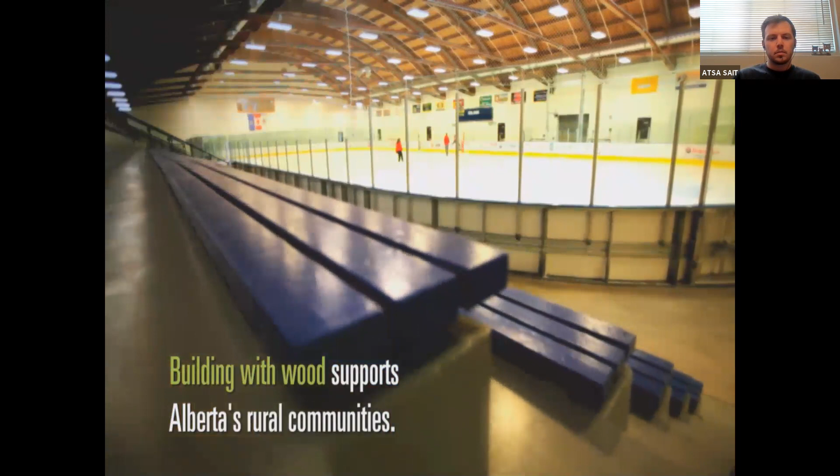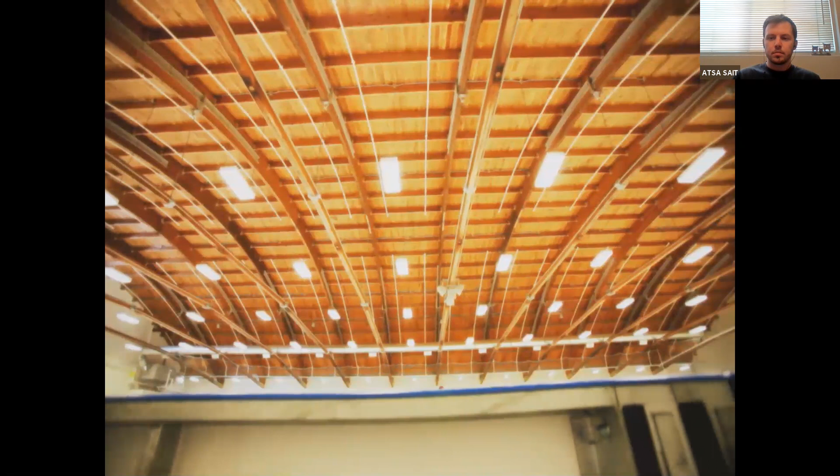There's also a real need to have the building fit into the environment here. Building buildings with natural materials, out of wood, stone, using natural materials that fit the mountain environment. The building needed to feel like it belonged in this place, and it was part of the community and part of that heritage. From a recyclable point of view, wood is vastly superior to other forms of construction.

I think all Albertans have a sense of pride with regards to our industries, and certainly the forest industry, but those of us that live and work in forest-based communities really have that pride because we see firsthand the great work that they do. It's amazing how many jobs are created in Alberta from the forest industry. We have over 16,000 jobs in the industry, creating economic benefits for Albertans of about $4 billion. So it's a wonderful industry for this province, and we can see the benefits in jobs and economic development in our communities is a huge benefit to this province.

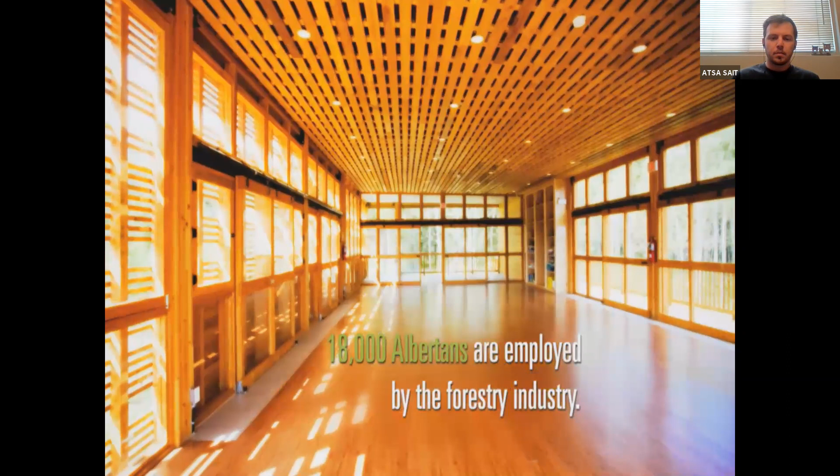Rather than use steel and concrete, which really don't have good environmental footprints and have very high carbon footprints for greenhouse gases, what we need to move towards is wood, which doesn't. It has a much better environmental message as long as it's sourced from sustainably managed forests that we have here in Canada, and therefore it's really always the right choice of material.